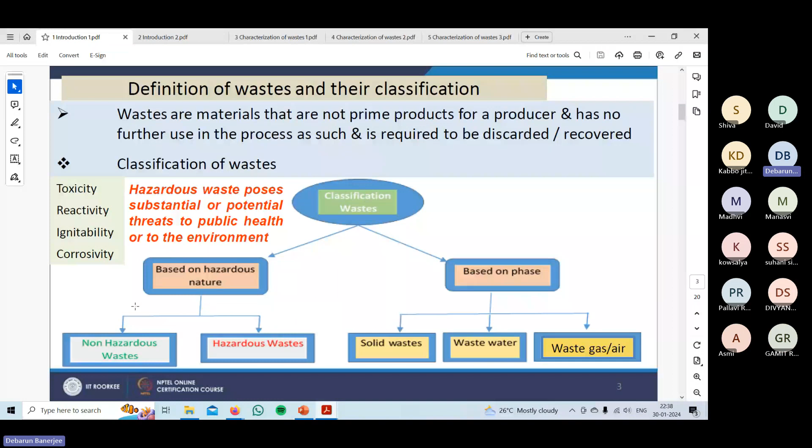When you talk about hazardous waste and non-hazardous waste, why are these particular things important? Because hazardous waste poses a certain amount of threat to our society or our health, and therefore its toxicity, reactivity, corrosivity, and ignitability become much more prominent. That is why it needs to be segregated based on whether it's hazardous or non-hazardous, and based on that its handling and processing would be depicted.

So there should be certain parameters, certain factors based on which waste can be segregated or categorized. Based on that, what can be the important quality parameters? The important quality parameters are...

Am I not audible? Audible to me.

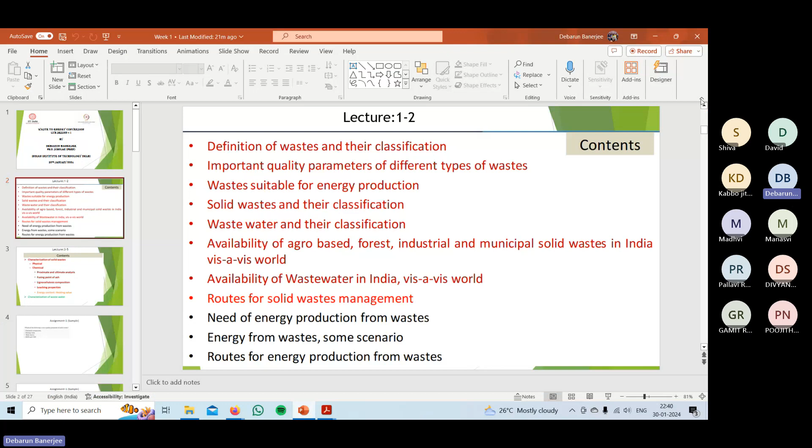Okay, coming back to our discussion. The solid waste's different quality parameters include the elemental composition, its proximate analysis results like moisture content, volatile matter, and ash content, its bulk density, its heating value - very important especially from the waste to energy conversion point of view - its permeability or hydraulic conductivity, and its particle size distribution. These are the main quality parameters of solid waste.

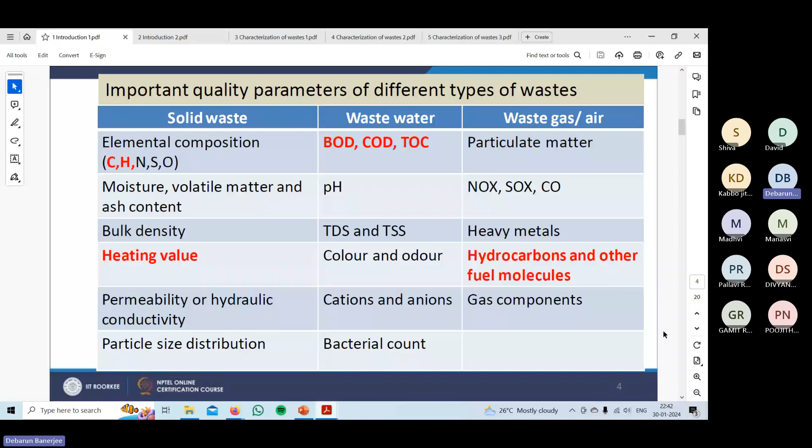Similarly, for wastewater: biological oxygen demand, chemical oxygen demand, total organic carbon, pH, total dissolved solid, total suspended solid, TDS, TSS, color and odor, cations and anions, and so on. Similarly, in gaseous waste: particulate matter, NOx, SOx, carbon monoxide, heavy metals, and other different materials like hydrocarbons or other fuel molecules or gas components.

As I initially told, what kind of wastes are actually suitable for energy production can be answered via quality parameters. Waste which can be used should have a high carbon content and a high heating value. Similarly, wastewater should have high biological oxygen demand and chemical oxygen demand values, and waste gases should have a high heating value.

So these are important parameters to be emphasized. This particular course is concentrated on solid wastes basically, and wastewater a bit. I would be more focused on solid wastes, and also to some extent on wastewater.

Coming to solid waste classification, I'll be discussing it further. It can be classified based on the source, based on biodegradability, based on combustibility, compostability, and usability. These are the basic classifications of solid wastes.

About 50% of solid waste is biodegradable in nature, 20% is recyclable, and 22% is inert. So you can find what comes under which category. There are also data on the different composition and heating values of solid waste in different cities and regions, but I won't go into much detail on that.

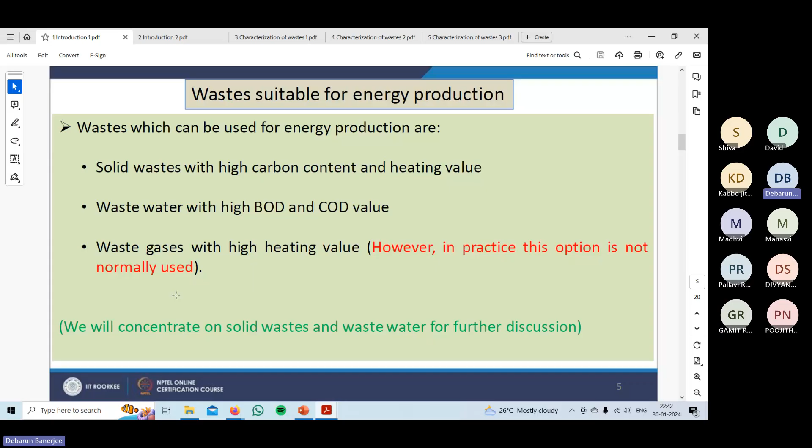Sorry, can't see the slides. I don't know if it's for others or only for me. Okay, I'll just unshare and share again. Is it visible now? Yes, thank you.

So the non-lignocellulosic biomass is basically edible in nature, and that is why for fuel production and energy production nowadays, the lignocellulosic biomass or lignocellulosic agricultural waste is being focused upon.

It contains majorly cellulose, hemicellulose, and lignin as major components. Based on their relative compositions, differences are made, and based on that, differences in their heating value and in energy production occur.

Similarly, wastewater has its own different classification. Wastewater can be obtained from oil spilling, rain leachate, industries, domestics, seawater, or storm drains. So these are different sources for wastewater.

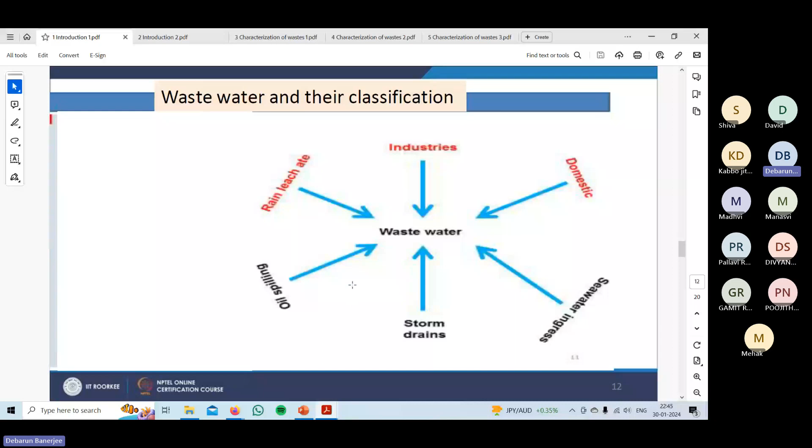A very typical composition of untreated domestic wastewater is shown here. Based on quality parameters like total solids, total dissolved solids, total suspended solids, BOD, and COD, wastewater is classified into different classes like low strength, medium strength, and high strength.

Basically, BOD and COD are the most important quality parameters of a particular wastewater. There's a simple relationship: higher BOD and higher COD means its concentration is more and it's stronger. Low strength wastewater has a low BOD of about 110, or COD of about 250.

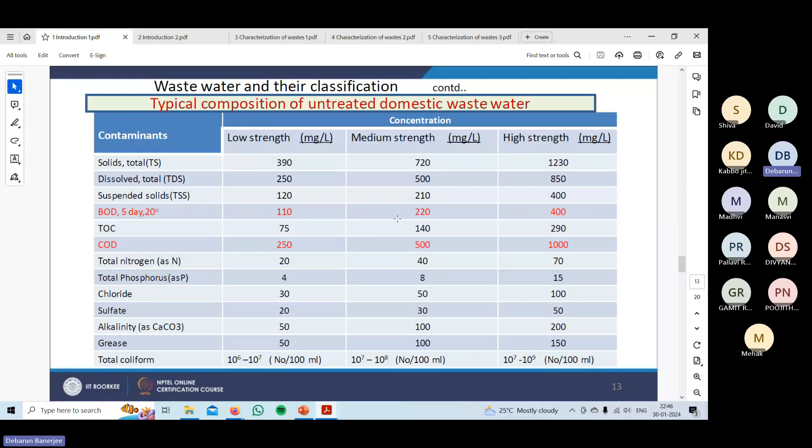Similarly, medium strength has about double that. So it's a kind of typical composition, obviously not a constant value—it would depend on various factors and sources.

Similarly, different types of other wastewater compositions, depending on sources like pulp and paper industry, distillery, sugar industry, are all classified, and the loads of this data are available in your note sheet.

The availability of agro waste, forest, industrial, and municipal solid waste in India is presented in this lecture. The generation of municipal solid waste is expected to rise by roughly 8% per year. Nowadays, climate change and waste management are the two most prominent problems in the global scenario as well as from an Indian scenario.

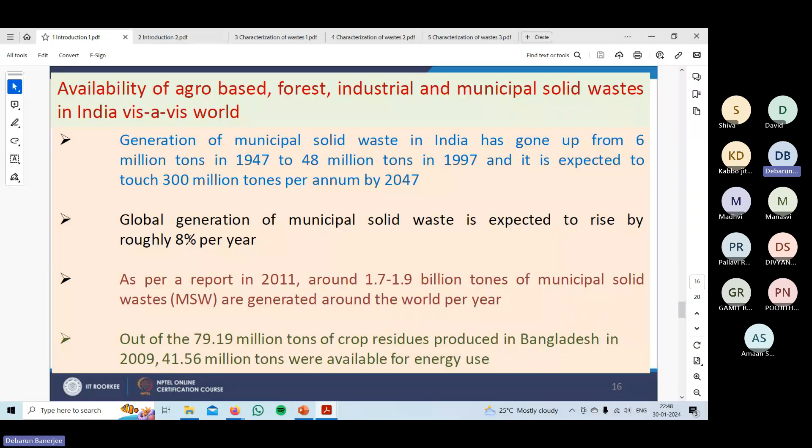However, this data is not very recent. In a 2011 report, close to 2 billion tons of municipal solid waste were generated around the world. Obviously this value has also increased, which is why roughly an 8 to 10% increase is usually exhibited.

So when you talk about solid waste management, there are different routes for solid waste management. Usually at source it is segregated, so that initial classification is very important—whether it's recyclable, hazardous, inert, or non-hazardous organic fraction.

After that segregation, the recyclable waste can be further segregated into combustible and non-combustible. The combustible parts basically go for fuel production and also some packing material or paper formation. The non-combustible parts such as metals, glasses, those kinds of materials come under non-combustible, and those go to the recycling industries. This kind of glass and metal can be recycled, recovered from the waste, and then goes back to the sources to synthesize further items.

So these form the part of the circular economy. Similarly, the combustible goes for fuel production, which comes majorly in the waste to energy conversion. Similarly, the organic fraction undergoes biological treatment—composting, vermicomposting, biogas, landfill gas, like this. So via these biological treatments, this kind of organic waste is treated.

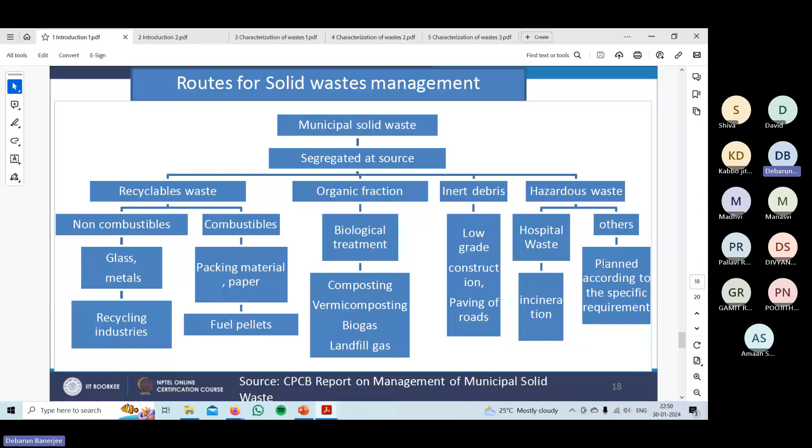Similarly, other wastes like inert and hazardous waste are also treated—not going into much detail for that. Further, some data are also shared within the first lecture.

Now we come to the second lecture. So after the routes for solid waste management covered in the first lecture, now the second one: need of energy production from wastes.

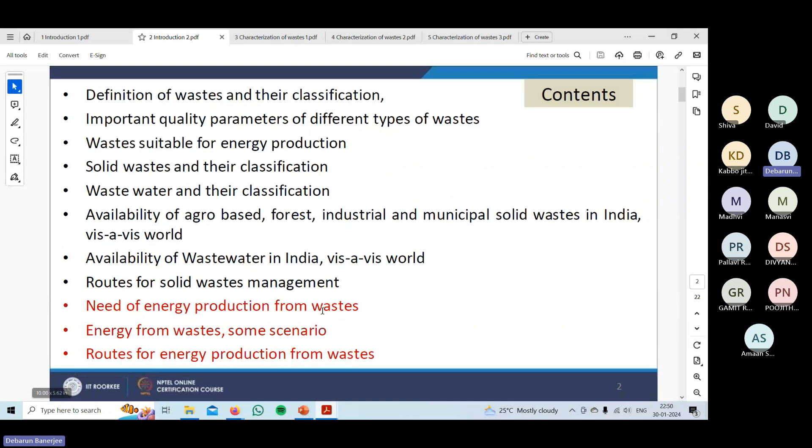These are interesting things, like why do we want to produce energy from waste? There are some points mentioned here: need of sustainable development, increasing generation of wastes and power demand, energy potential of some solid waste components and wastewaters, reduction of inert in municipal solid waste.

As I told, climate change and waste management are the two most prominent problems globally nowadays. To tackle these two challenges together, waste conversion to energy or waste conversion to value-added products is the most important solution. So until and unless we reduce the amount of waste lying and get the waste composted or incinerated, we cannot tackle the climate change as well as the growing energy demand.

There is a high amount of energy demand with the growing population and with the growing development, the modernization of the current global scenario. So to tackle this kind of situation, this conversion of waste to a high energy material or particular direct energy production is important.

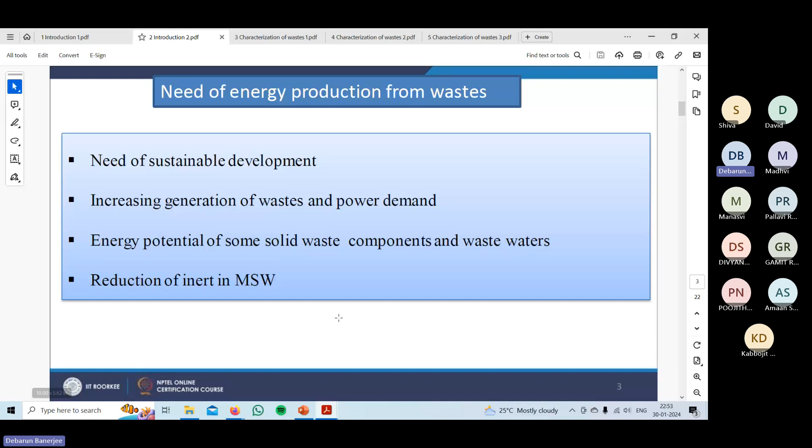As is written here, some of the solid waste components have a high energy value or high heating value or high energy potential, so why do we waste that particular energy potential? Ultimately, if we do a techno-economic analysis or life cycle analysis, you would find it becomes much more economically viable and environmentally benign if we convert these solid waste components or wastewaters to some energy material or directly produce energy from it.

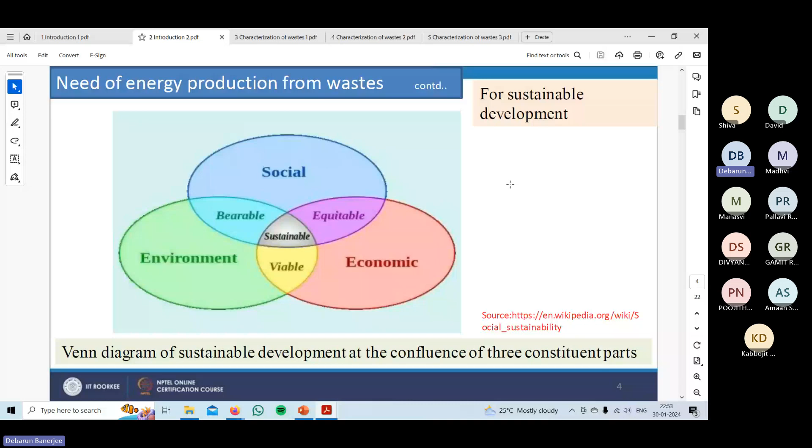As I told, there's the environment, economic and social—at the conjunction of all these three comes sustainable development. It has the economic part, the environmental impact, environmental viability, environmental positive approach, and the social responsibility. That is why energy production from waste is very, very important.

Now, why again is proper solid waste management important? If we don't do proper solid waste management, it would cause air pollution, water pollution, soil pollution—different types of pollution. Again, environmental contamination occurs during the process, obviously, since no process is absolutely emission-free or 100% green. So during the process there is some pollution, some contamination in some way or the other.

Now, if we generate waste and don't treat it properly, that waste would also cause other forms of pollution like air, water, and soil pollution. Some examples: municipal solid waste clogs the drainage system. We have seen this, like plastics and other solid waste which are not very biodegradable actually block your drainage system, pipes, the sewage things, and ultimately it causes stagnant water, which causes breeding of mosquitoes or insects. And if your wastewater pipe is getting clogged, it would ultimately overflow and cause floods and all these things. So together, all kinds of pollution, all kinds of environmental contamination, take part in this.

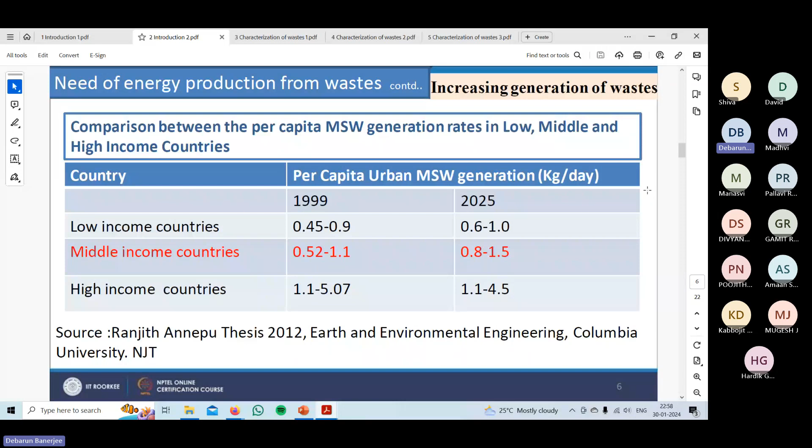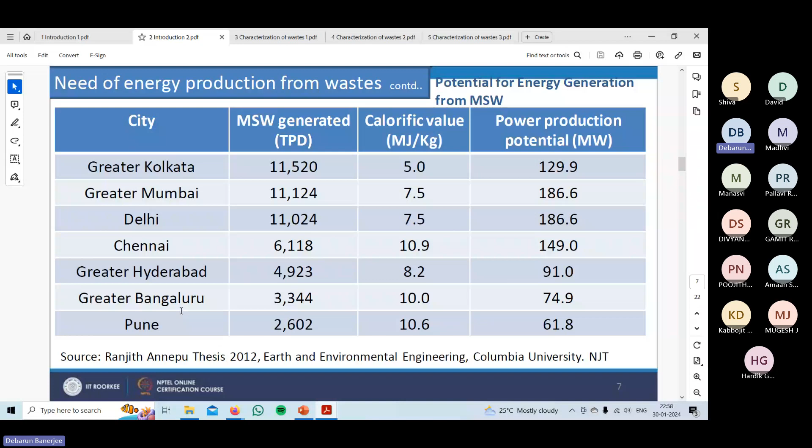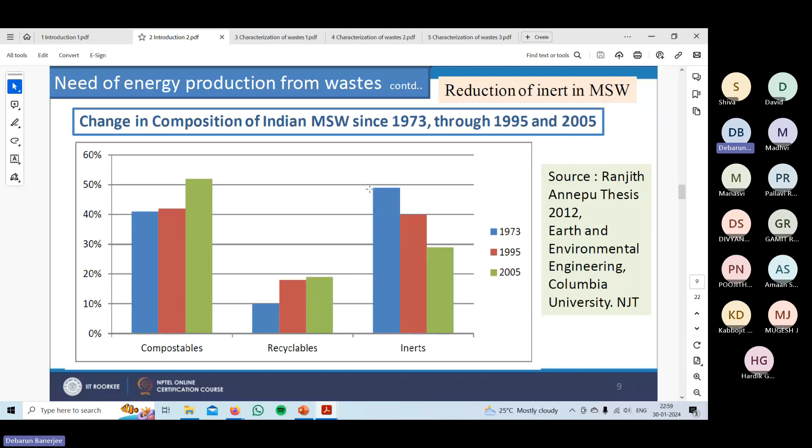And if we see the ratio of the different types of waste materials, you can see that the inert materials are decreasing, and comparatively the compostables have a much higher increase, and the recyclables also have a steady increase. So it means that in some way or the other, municipal solid waste to energy conversion is getting more and more encouraged. One such example is the reduction of inert materials in municipal solid waste. And some further examples are shown here.

And if we want to give an overview of the overall scenario of waste to energy conversion, we can say that waste to energy technologies use municipal solid waste or any other waste material containing huge amounts of renewable and biological materials to generate heat, electricity and fuel through different complex conversion methods. This is a one line statement about the overall scenario. What is waste to energy?

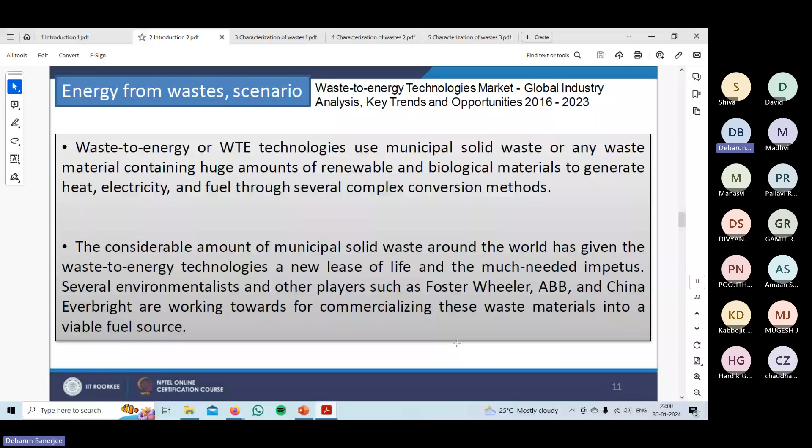Technology conversion. The considerable amount of municipal solid waste around the world has given waste to energy technologies a new lease of life and the much needed impetus. Several environmentalists and other players are working towards commercializing these waste materials into a viable fuel source. I've already talked about this. So the cycle of waste to energy is also very important.

In a household, a certain amount of waste is generated. Then it is thermally treated in waste to energy plants, and from the plants we get different energy sources, fuels in different forms, whether liquid fuel, solid fuel, or some other. And from that waste to energy conversion, a certain amount of heat is also provided. That heat we can further utilize for the inhabitants, the households, or other industries, roadside electricity, street lights, all those things.

It can be used to generate electricity. That electricity can be used directly to supply the households and the society. So ultimately, you're saving. So it basically works as a waste to energy cycle in a cyclic form, which ultimately targets a circular economy rather than a linear economy.

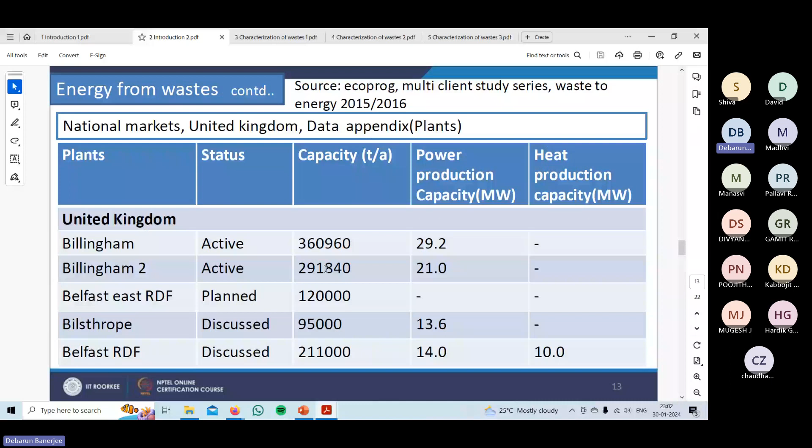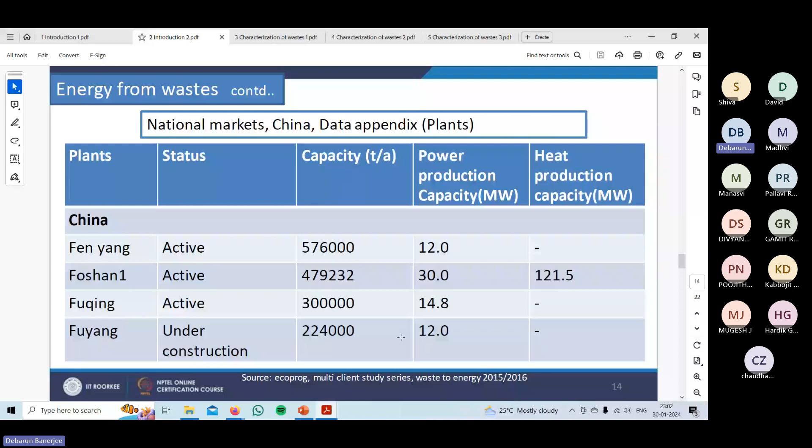Okay. I am not going into the details of these particular data; you can easily find them. So a lot of focus nowadays is being put on renewable energies such as wind energy, hydropower, biomass, and among them waste to energy also.

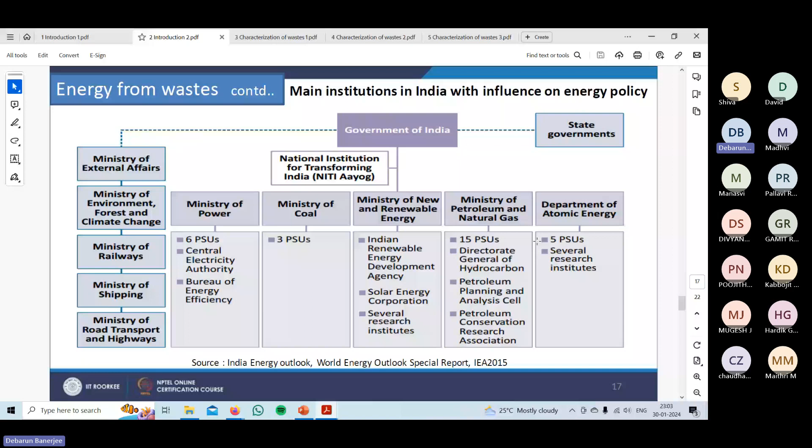And then some Indian data and information, where the main institutions which govern or determine the energy policy of the country are listed here, such as the Ministry of External Affairs, Ministry of Environment, Forest and Climate Change, Ministry of Power, Ministry of Coal, New and Renewable Energy (MNRE), Ministry of Petroleum and Natural Gas, and DAE, the Department of Atomic Energy. So these are some of the stakeholders in energy policy determination.

Okay. Now we will go to a bit of the technical things. So the routes for energy production from waste. Solid waste and biomass are what we will be focusing on. This kind of solid waste and biomass can be converted to energy via thermochemical conversion, biological conversion, chemical conversion, and physical conversion. Under thermochemical conversion, we get combustion, gasification, pyrolysis, liquefaction, those kinds of processes.

Biological conversion is carried out via processes based on bacteria, based on enzymes, those kinds of biological sources, which carry out energy production via fermentation, anaerobic digestion, and the different ultimate products used as an energy source are also shown here. Okay.

Apart from that, chemical conversion like transesterification, hydrolysis, solvent extraction, those are the chemical processes. And a basic physical conversion. However, physical conversion directly is not much helpful for renewable fuel generation. So after physical conversion, what is usually being researched or emphasized nowadays is to further modify this physically treated biomass or waste material

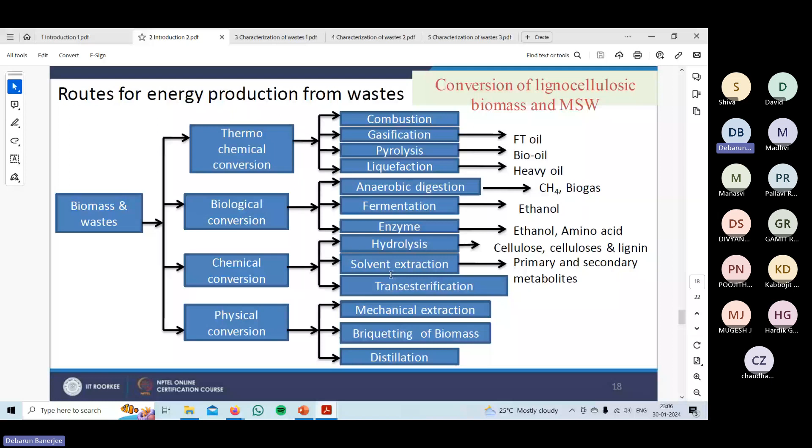So thermochemical versus biological conversion. If you compare these two conversion routes, thermochemical conversion is carried out at higher temperature or harsh conditions, usually requiring high temperature and pressure, and it's a much more conventional route. So its universality is very high; it's effectively applied to almost any biomass feedstock. On the other hand, the biological route involves the use of microbes, enzymes, or different chemicals to utilize a limited range of biomass.

So, as I told, high temperature and pressure conditions are usually required in thermochemical conversion, so it usually results in a relatively higher rate of productivity. The biological process, on the other hand, involves microbes, enzymes, or bacteria, so the rate of production is usually low. The rate of reaction, the rate constant, all those are usually low, so it's a much slower process.

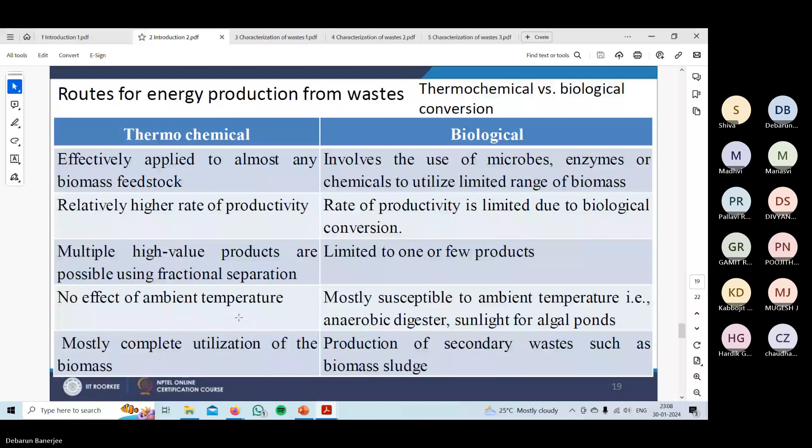Okay. So similar to solid waste, wastewater is also a good source of energy. Wastewater can be converted via anaerobic digestion and used for biogas production, and wastewater can also be used in microbial fuel cells for electricity generation. Okay.

So there are also some challenges, some regulations, and some other aspects we need to consider together. These different technology options are not all mature enough. I already told you that the thermochemical process is much more mature and has been developed for a long time.

Nowadays the biological process is also done commercially, but there are also photocatalytic, electrocatalytic, and plasma technologies. These new age technologies are growing day in, day out. They have only been proven at laboratory scale or maybe up to pilot scale, but not at a high commercial level. So those are the other growing options which can change the way waste to energy production technologies look or work. Okay.

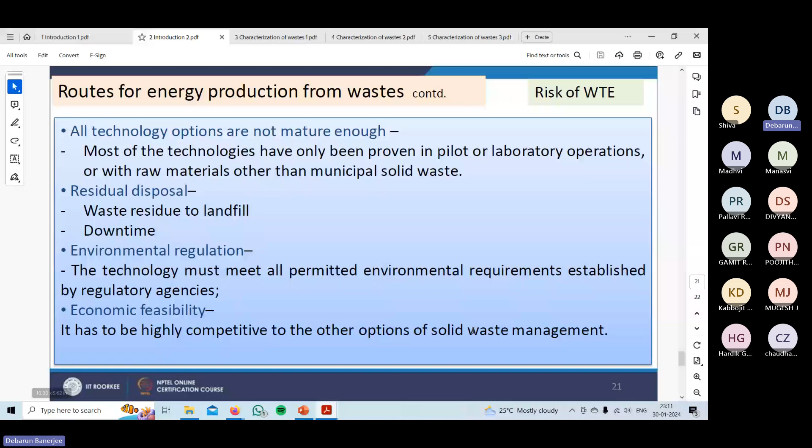Yeah. So that was the second lecture. Okay.

So from third to fifth lecture, what has been taught is basically the characterization of solid wastes, different physical characterization, chemical characterization. Under the chemical characterizations, the proximate and ultimate analysis comes. Along with that, the fusion point of ash, lignocellulosic composition, the different leaching properties of the solid waste, and obviously the most important, how much energy it actually contains, or how much energy it can actually produce when it would be used in a particular energy production technology. That heating value estimation is very important.

And apart from the solid waste characterization, there are different characterizations of the wastewater, such as the TDS, TSS, COD, BOD: the total suspended solid, total dissolved solid, total oxygen demand, chemical oxygen demand, biological oxygen demand. Those are some of the things which were also shown. Okay. So the physical properties which are important are specific weight or density, particle size and size distribution, permeability or hydraulic conductivity, and moisture content. Those are some of the important physical properties.

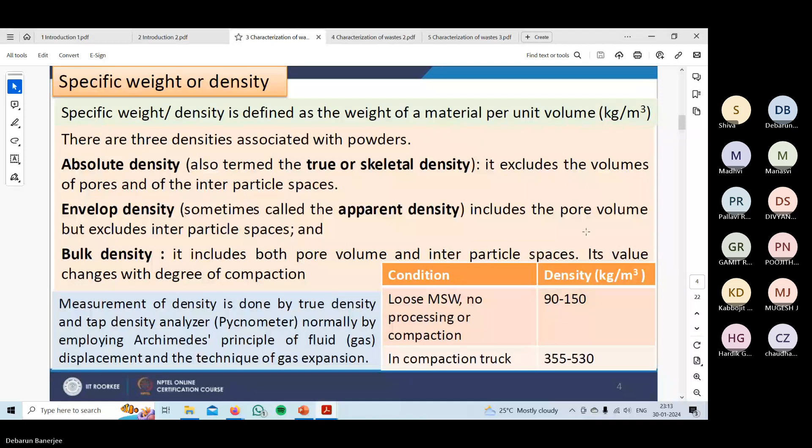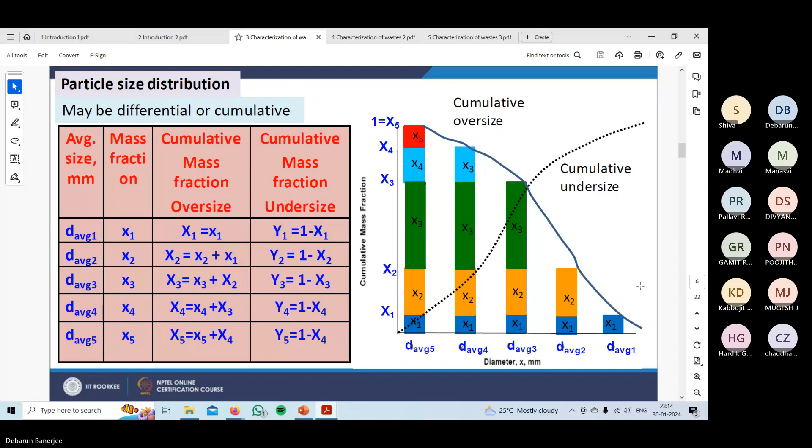So when we talk about solid waste, that is one of the major challenges which I think solid waste management has: the heterogeneity. There are multiple varieties of waste materials or waste samples, so to characterize them based on a certain defined factor becomes a very challenging thing.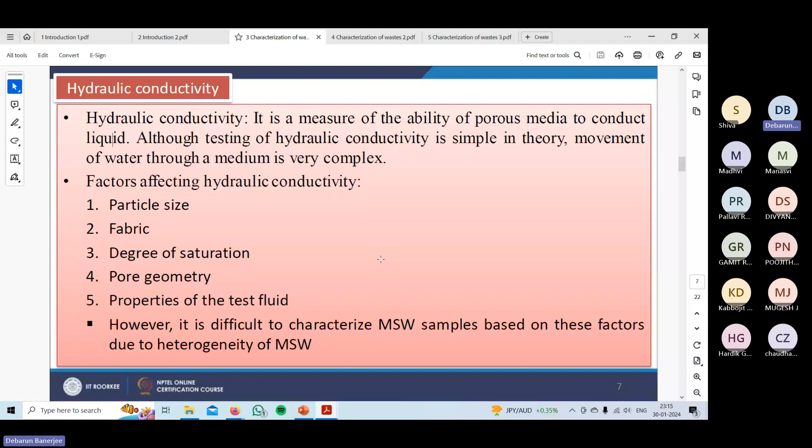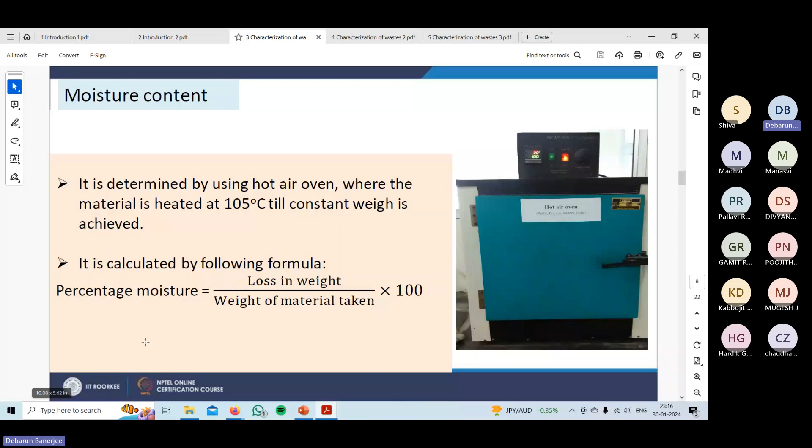Then the moisture content. So how is it determined? Moisture content is determined by using a hot air oven where the material is heated at 105 degrees Celsius till constant weight is achieved, and it's calculated by a simple formula: the loss in weight divided by weight of material taken. This will be the percentage moisture. Very simple. Similarly, the chemical properties of the solid waste can be determined by the proximate analysis, the ultimate analysis, the fusing point of ash, lignocellulosic composition.

For the hazardous waste, particularly the leaching properties, because of their hazardous nature, we need to know when you are carrying this particular waste, or when it is in contact with some other material, whether it would get leached or not, in some adverse conditions, because maybe some radioactive material is there, uranium, thorium. Those kinds of radioactive materials are very dangerous. Even at the ppm level or the ppb level, they are very dangerous, and they create some serious issues in the human body, right? So that is why these leaching properties are important to understand and determine, and the energy content from the heating value.

So proximate analysis gives us the details about the moisture content, volatile matter content, ash content, and fixed carbon content via different ways of heating the material. Okay, and for different municipal solid waste, their moisture, volatile, and this kind of composition is also very different.

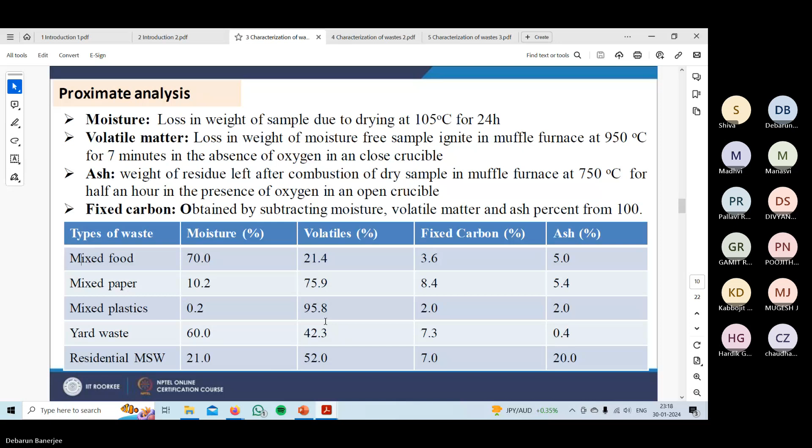Similarly, the CHNS analysis or the ultimate analysis gives us the carbon, hydrogen, nitrogen, and sulfur quantity of the waste material. And how it is calculated: it is basically calculated via the emission of carbon dioxide, H2O, nitrogen, which is usually inert, and SO2, sulfur dioxide. So based on how much of those gases are emitted, we take it that S plus O2 is SO2, right? So 1 mole of S would give us 1 mole of SO2.

So if we get a certain amount of SO2 in the output, we know that this amount of sulfur is present. Similarly with the CO2 and H2O, and N2 also, right? And N2 can remain as nitrogen, or it can become nitrous or nitric oxides, NO or NO2. So there are different chambers, different collecting traps and absorbing traps where these different gases are selectively absorbed, and based on that they are quantified.

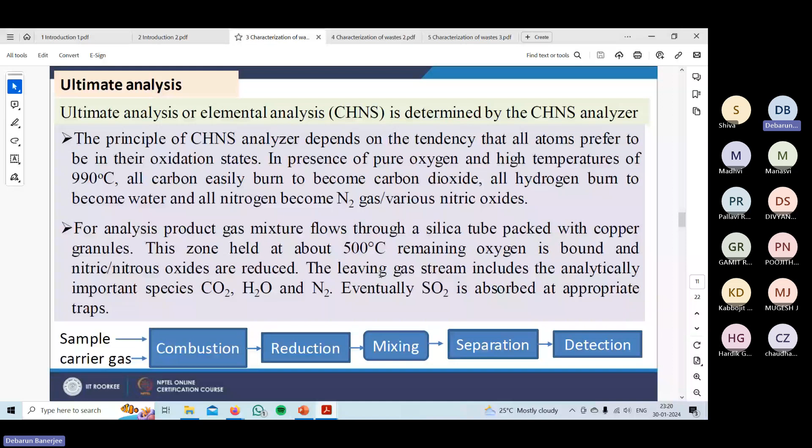Okay, so in the ultimate analysis, high purity helium is used as carrier gas, and finally the gas mixture is brought to a defined pressure or volume state and is passed to a gas chromatographic system, GC. So the GC would give us the nitrogen, CO2, H2O and SO2 as I told. And via the calibration, you get the area under the curve of each gas, and we do the back calculation that 1 mole of S would give us 1 mole of SO2. So by back calculation we get that this amount of sulfur is present in our sample. Similarly with the other elements also.

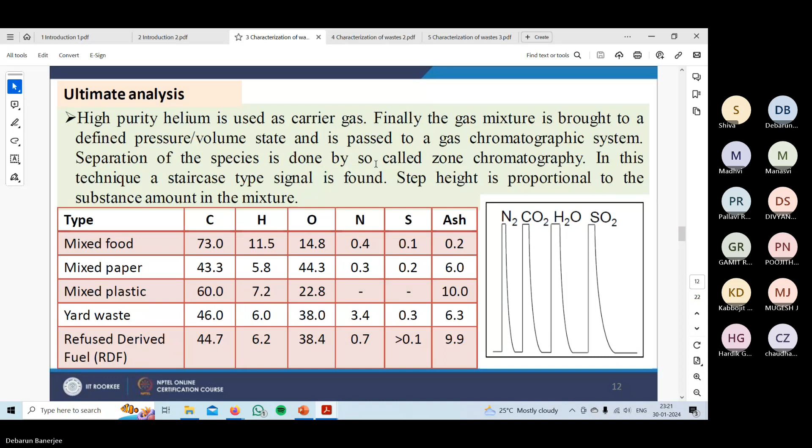So another characterization technique is the fusing point of ash. The fusing point of ash is the temperature at which the ash resulting from the burning of waste forms a solid by fusion and agglomeration. Usually the waste material has a high fusing temperature, about 1100 or 1200 degrees Celsius. So it is the temperature of the ash formed after the conversion of the waste material, so we know the operating temperature range for this particular ash as well.

So that is why these temperatures are important, and experimentally it can be determined using a furnace, simply taking different temperature values and checking when the ash forms a solid clinker by fusion and agglomeration. Usually ash is a powdery kind of material, but when it is oxidized again at a very high temperature in the furnace, it undergoes agglomeration, and that temperature is called the ash fusion temperature.

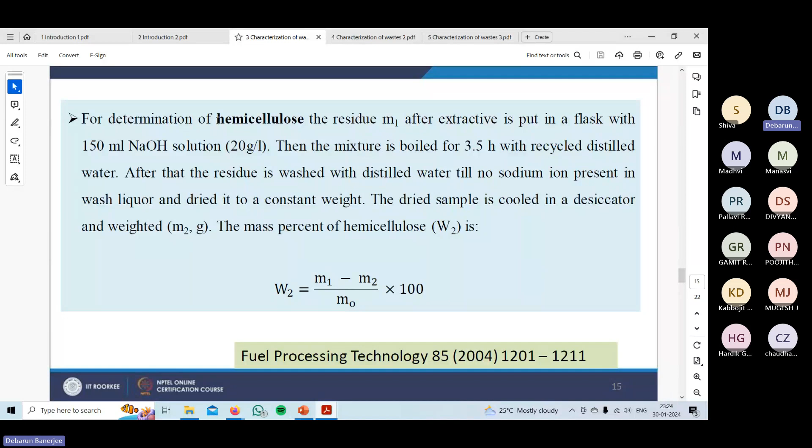Which means that the benzene and ethanol mixture has actually extracted that kind of material from your lignocellulosic sample. So that is called the amount of the extractives in the sample. Similarly, for determination of hemicellulose, after the extractives, because otherwise these extractives, if you don't extract them, would be incorporated or would create some problems during these other materials' calculations. So that is why the extractives are usually taken out earlier, and then the hemicellulose, lignin, and cellulose determination.

Okay, those details are already shown in the particular lecture. You should go through it. And also the leaching test is particularly for hazardous material. What the leaching test determines is the different heavy metals like arsenic, barium, cadmium, chromium, lead, mercury, selenium, silver, these kinds of heavy metals, and some organic solvents like carbon tetrachloride, pyridine, benzene, and all these things.

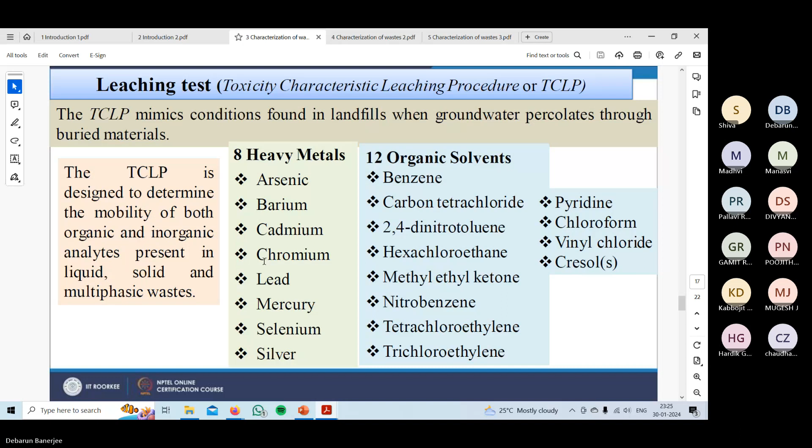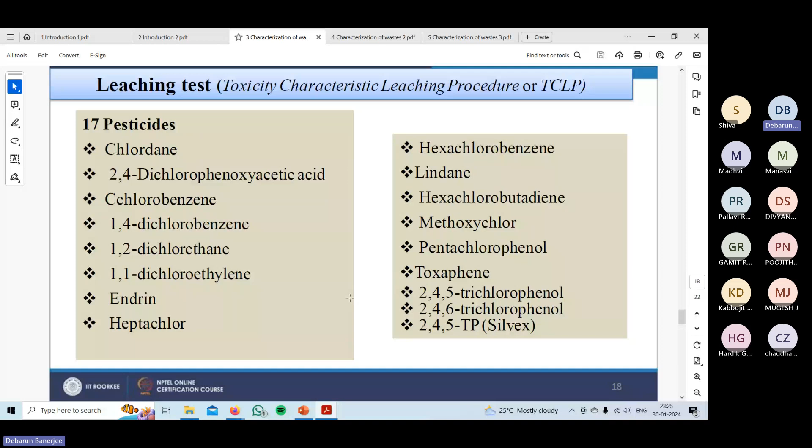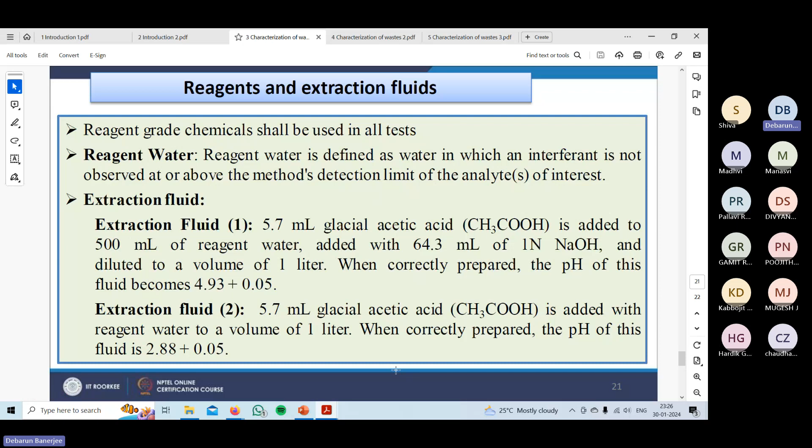Okay, and apart from that, some pesticides can also be identified, whether this particular material is present and whether it is getting leached or not. Okay, and some other reagents, and basically the extraction fluid quantities for the waste-to-energy conversion, and as a part of this characterization, materials like the reagent water, the extraction fluids, the different types of extraction fluids, those are also very important.

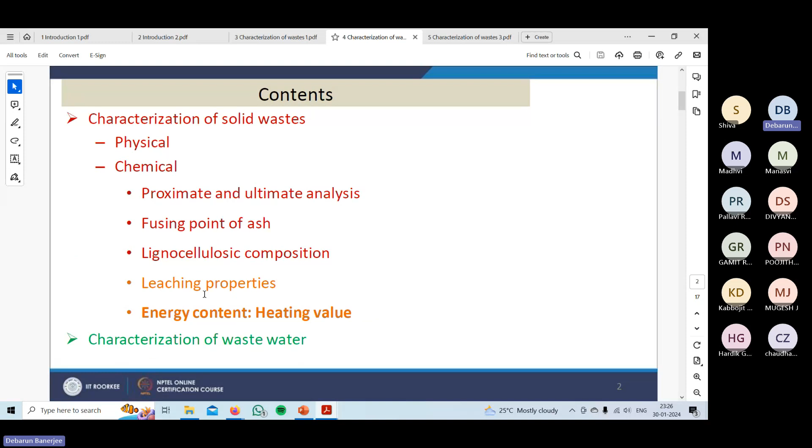In line with this, the heating value determination is also a very important aspect, the heating value or the calorific value as we call it. It can be a higher heating value or it can be a lower heating value. Okay, so usually a common method is to get the lower heating value and then add the heat of vaporization of the water. Just add them and then get the higher heating value.

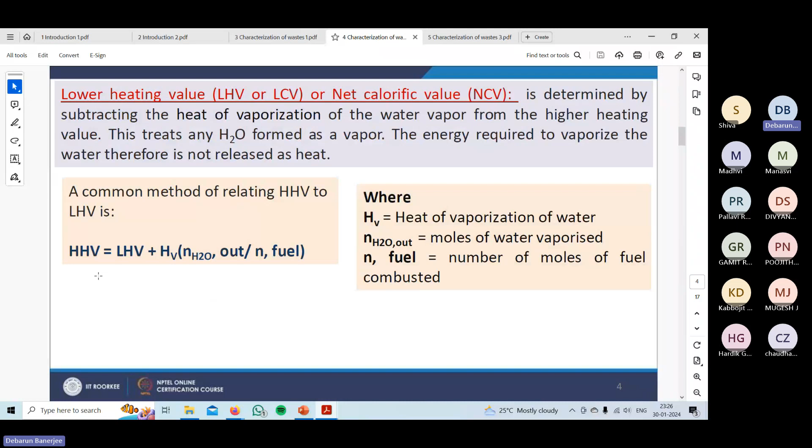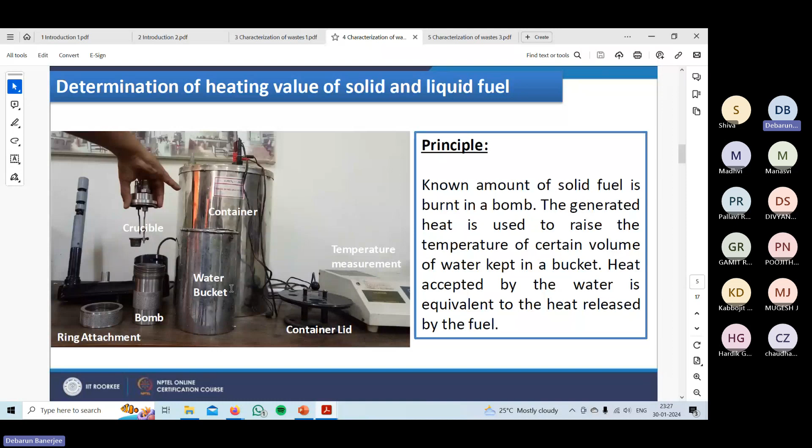So very simple, you place a sample in this bomb calorimeter and you ignite it. It would get burned or combusted, and obviously there will be some heat generation. That generated heat would increase the temperature of the water bucket in which the bomb is put. So from the temperature increase of the water we get how much heat is generated from the material. Okay,

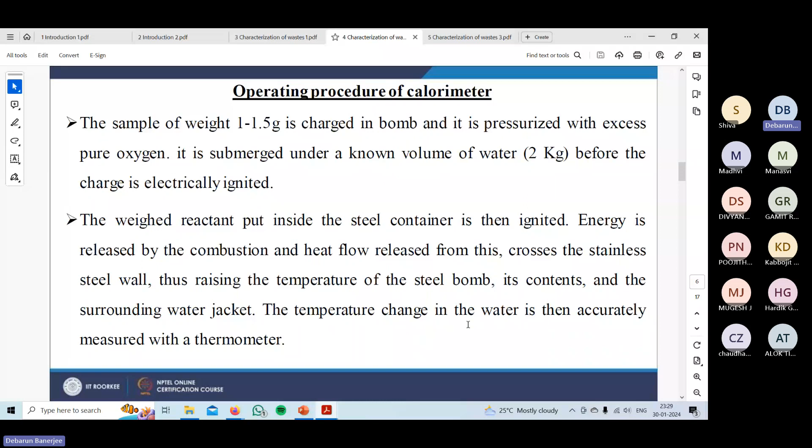surrounding water jacket. The steel bomb temperature increases, its contents' temperature increases, and the water temperature also increases. So that temperature change in the water is accurately measured and correlated with the amount of heat released. Okay, and then the heat of combustion is calculated based on that. There is also a problem; we will be discussing that sample problem.

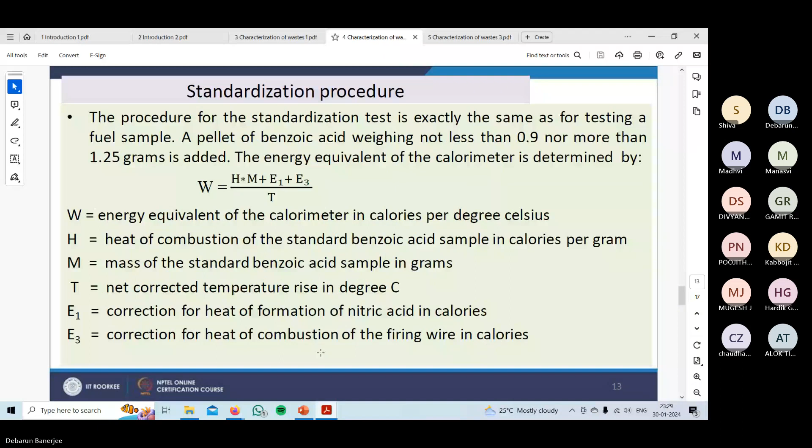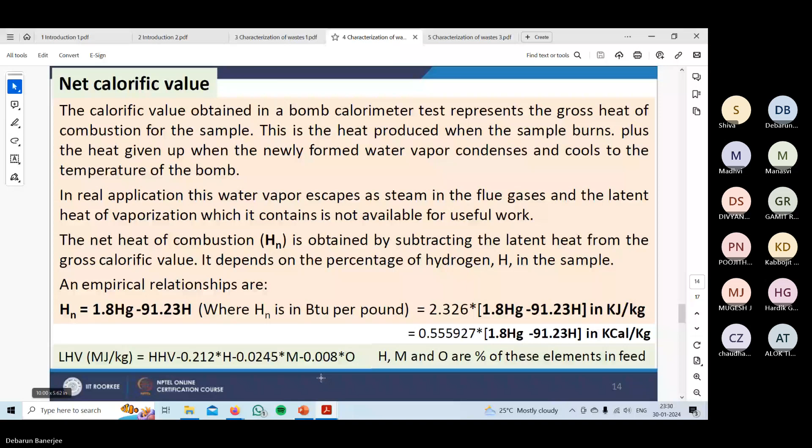And the way we get the gross calorific value, we use that gross calorific value, and using the net heat of combustion we can also get the net calorific value. So some correlations are also provided here between the net heat of combustion, the percentage of hydrogen and the gross calorific value. And based on that there are different correlations for determination of the gross calorific value based on the fixed carbon and volatile matter, and also based on the CHNS analysis. Multiple scientists have given different correlations.

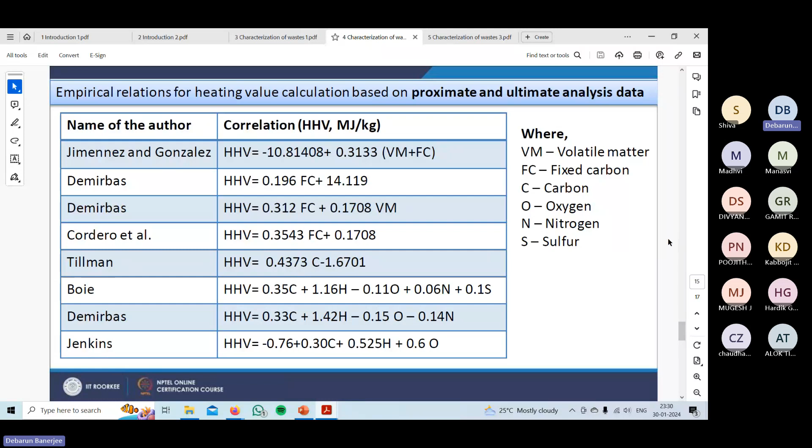If you are asked in your examination, it might be asked like this: based on the Jenkins correlation, determine the higher heating value of the material having this kind of composition. I don't know whether they might give you the correlation or not. So you might also check this kind of correlation. Okay.

The final lecture covers the characterization of wastewater, which involves physical, chemical, and biological characterization.

In physical characterization, we have total solids, which include total suspended solids such as turbidity, fixed suspended solids, volatile suspended solids, total dissolved solids, fixed or volatile dissolved solids, and simple properties like temperature, taste, odor, and color.

The important chemical characteristics are the hardness of water, BOD and COD, that is, biological oxygen demand and chemical oxygen demand.

Nutrients like nitrogen and phosphorus, the amounts of salts of inorganic materials like calcium, magnesium, aluminum, chlorine, carbonates and bicarbonates, and heavy metals, which were already discussed for solid waste.

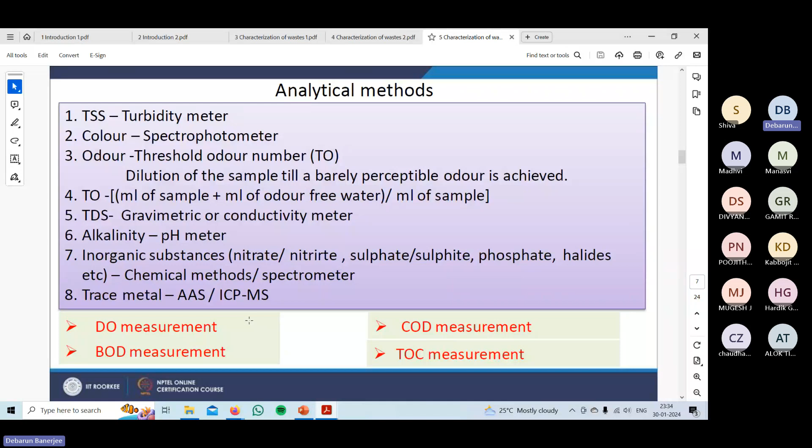ICP-MS stands for inductively coupled plasma mass spectrometry, and AAS is atomic absorption spectroscopy. These are usually used for metal or trace metal determination down to the ppm or even ppb level, for both solid and liquid materials.

Apart from that, dissolved oxygen measurement is carried out via Winkler's method, where excess manganese salt, iodide salt, and hydroxide ions are added to a water sample.

The dissolved oxygen converts the manganese ion Mn2+ to MnO2. This manganese-containing precipitate is then dissolved back into solution under acidic conditions.

The MnO2 gets dissolved again and is converted back into Mn2+ salt in the dissolved state. The iodide ion then gets converted into elemental iodine, and from that the dissolved oxygen is calculated.

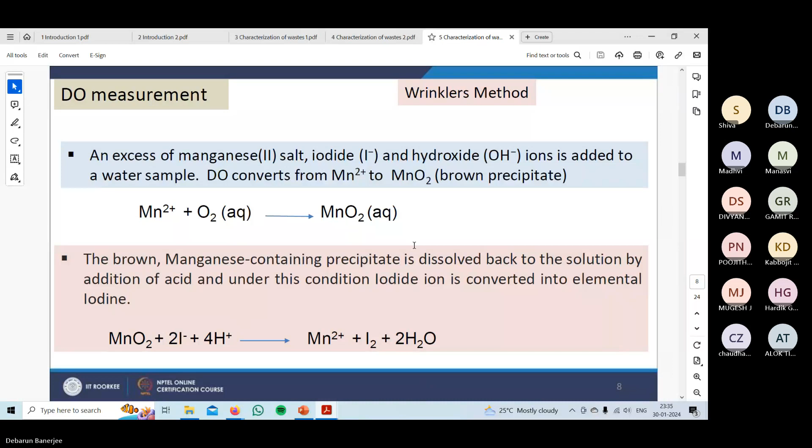Apart from the Winkler's method, another important technique is the membrane electrode method. In a typical dissolved oxygen sensor, there are two electrodes, an anode and a cathode.

The cathode is usually made of gold, and the anode is made of silver.

They are immersed in an electrolyte solution and separated from the sample to be measured by a gas-permeable membrane.

There is permeation between the cathode and anode within the electrolyte, and certain chemical reactions occur. At the gold cathode, oxygen plus 2H2O plus 4 electrons gives hydroxyl ions, and at the silver anode, silver chloride (AgCl) is formed.

Based on that, we get a resulting current flow.

There is migration of ions toward the cathode and anode from the electrolyte, and the amount of current flowed is measured. This resulting current flow is directly proportional to the dissolved oxygen content in the stream.

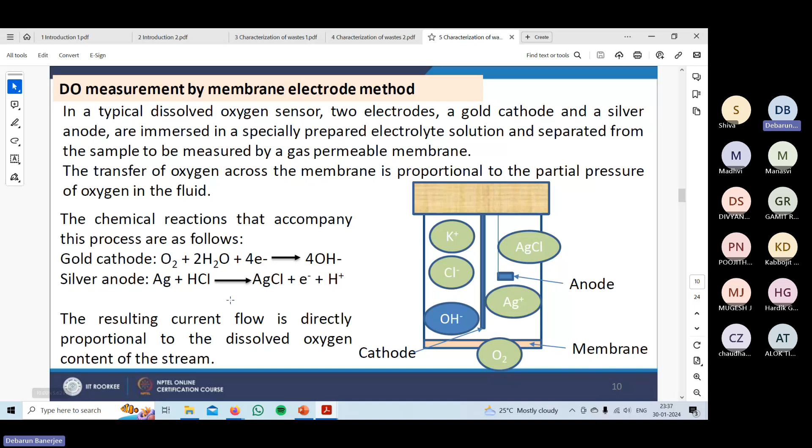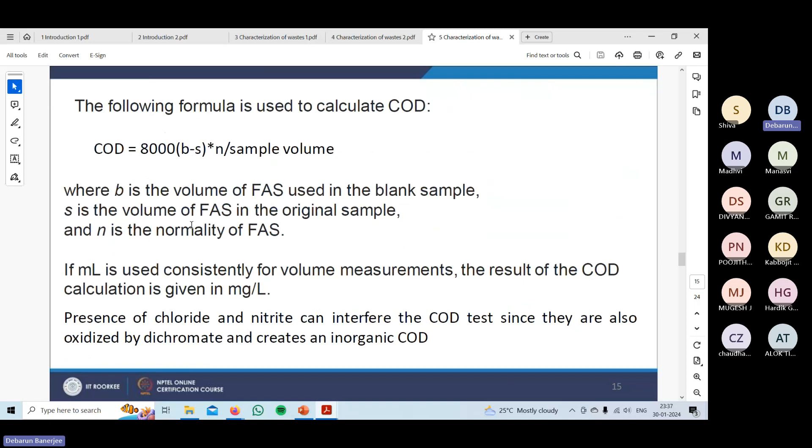Similarly, you should check BOD and COD methods. I'm not going into much detail on biological oxygen demand, chemical oxygen demand, or the total organic carbon test. As mentioned earlier, the atomic absorption spectrophotometer is also very important.

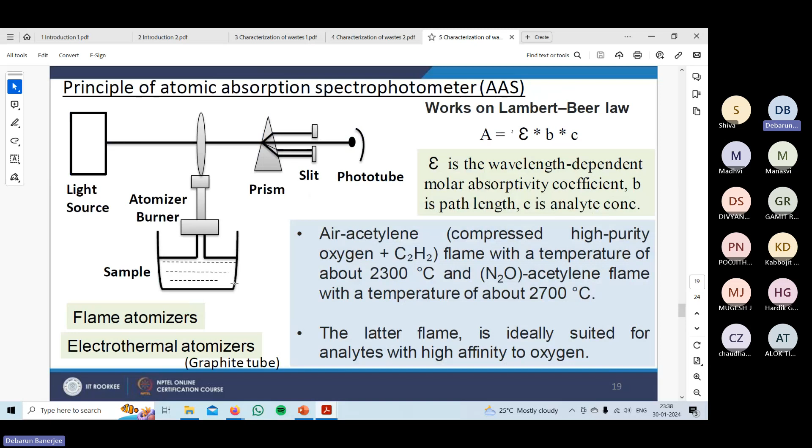They have shown the working principle of the atomic absorption spectrophotometer, which is used for metal determination or metal content determination even at very low quantities.

Apart from the chemical properties, some bacteriological or biological measurements are also done, such as based on the membrane filter technique, along with total solids and total volatile solids. You should check these methodologies as well.

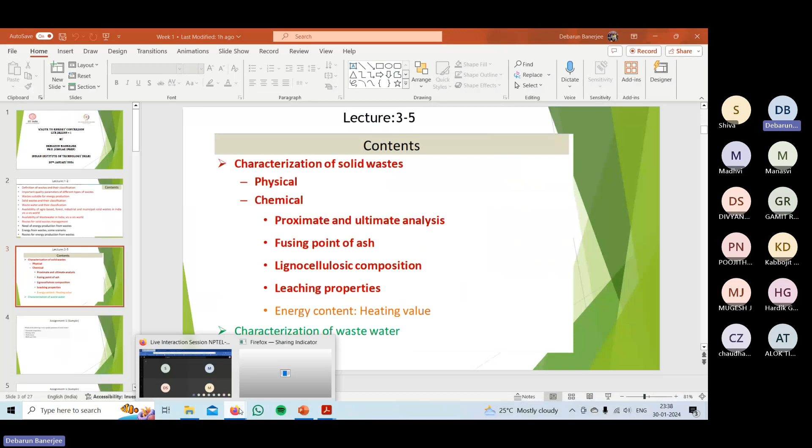After that, we'll check some sample questions.

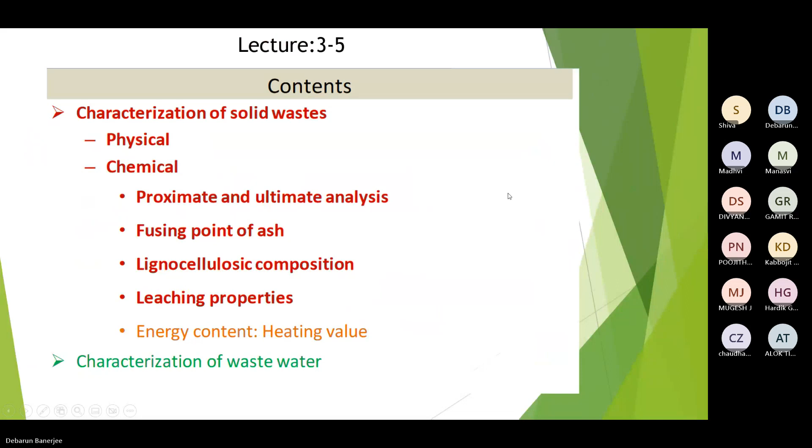Okay, so the first question is, which of the following is not a quality parameter of solid wastes? Elemental composition, heating value, bulk density, BOD and COD.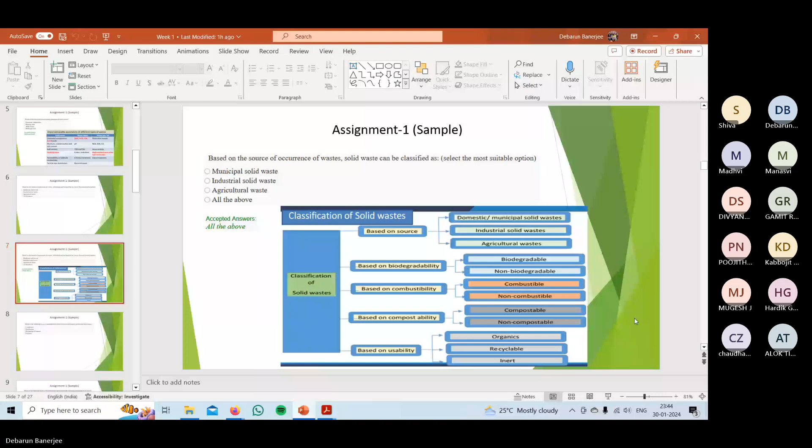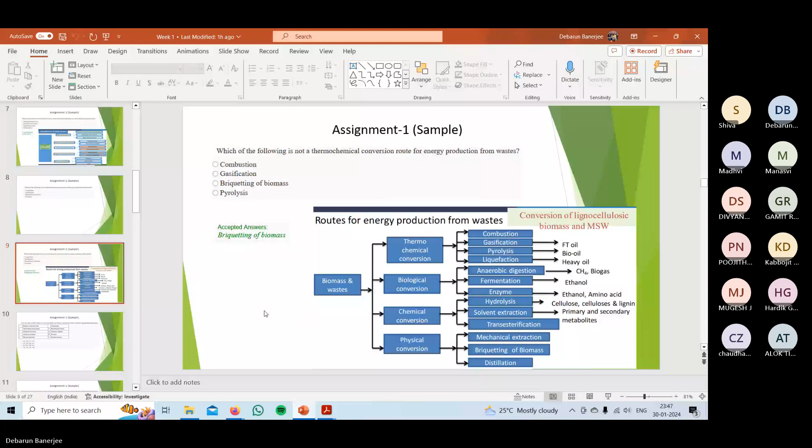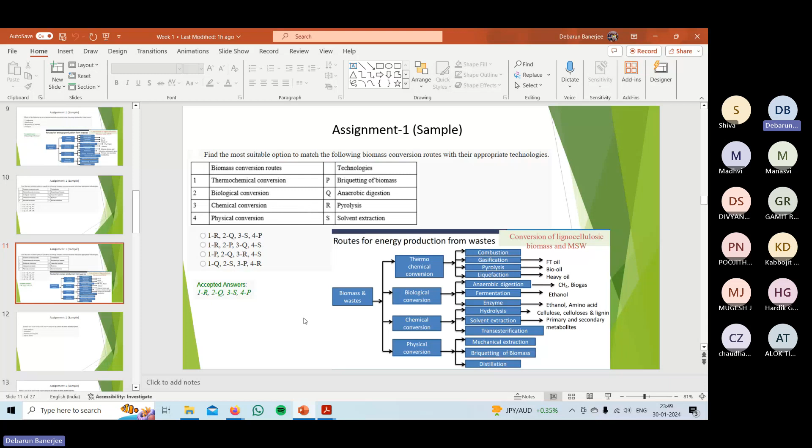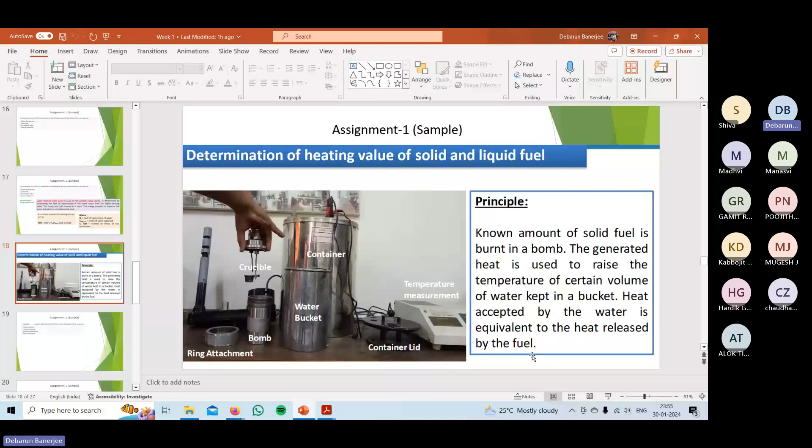And to determine that particular heating value, I've already shown that the bomb calorimeter is used, and basically the amount of temperature increase of the water is correlated with the heating value of the sample.

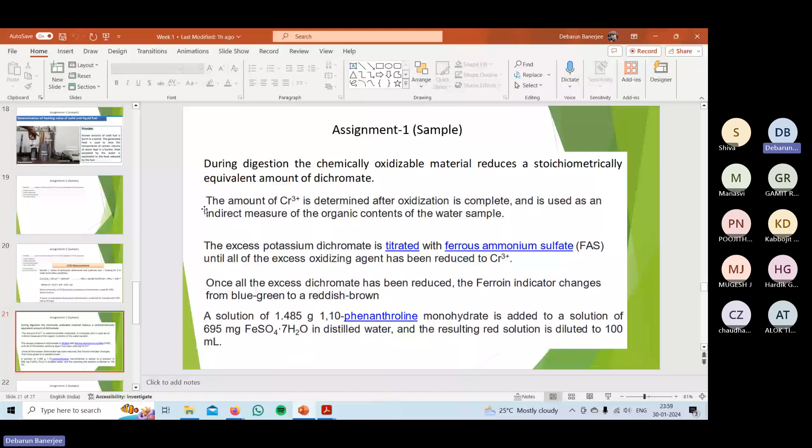So during the digestion of this particular chemically oxidizable material, a stoichiometrically equivalent amount of dichromate is reduced, and the amount of Cr3+ is determined after the complete oxidation, and that is used as the indirect measure of the organic component of the water sample. So the amount of Cr3+ is used as the indirect measure of the chemical oxygen demand content of this particular wastewater.

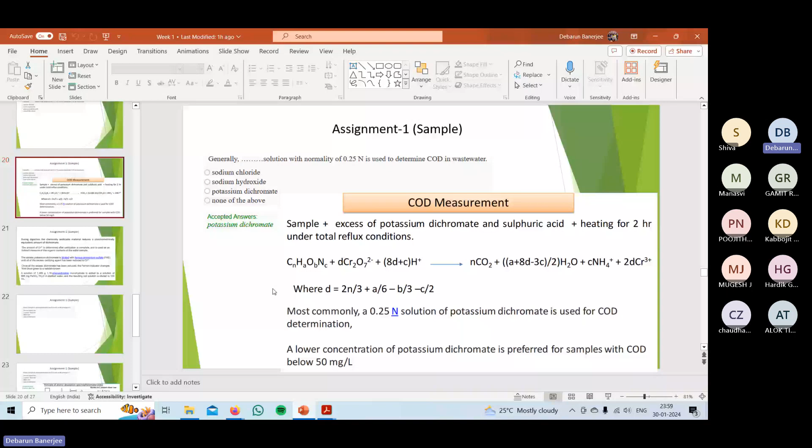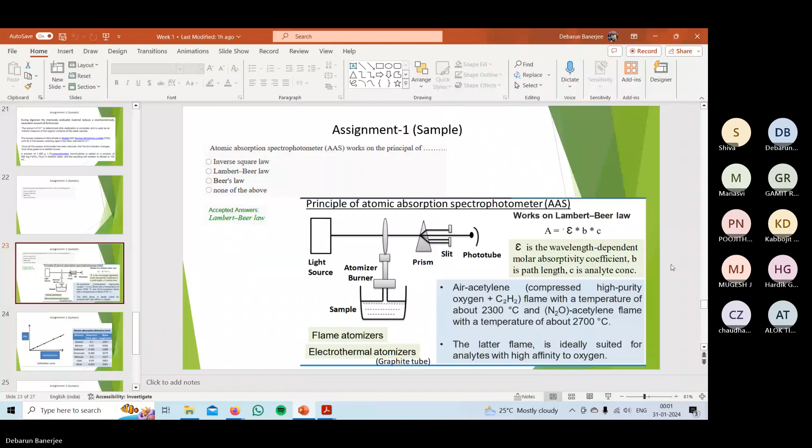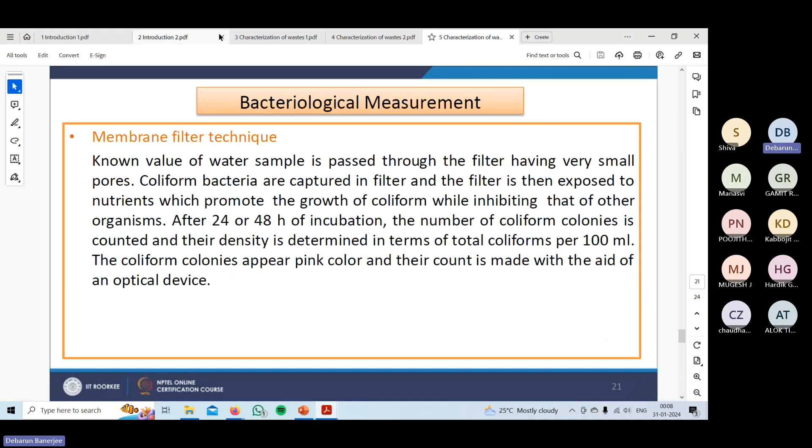So you have to basically use this kind of formula: the gross heating value equals T multiplied by W minus E1 minus E2 minus E3. This is basically the gross heat of combustion value, H, which is T multiplied by W minus E1 minus E2 minus E3, divided by M. So W is basically the energy equivalent of the calorimeter, and E1, E2, E3 are the correction factors.

E1 is basically equal to C1, E2 is basically 13.7 into C2, and E3 is basically, depending on where it's used, 2.3 into C3 or 2.7 into C3, or it can also be 0. M is the amount of material used, the mass of the sample. What are C1, C2, C3? C1 is the milliliter of the standard alkali solution used in the acid titration, C2 is the percentage of sulfur in the sample, and C3 is the centimeter of fuse wire.

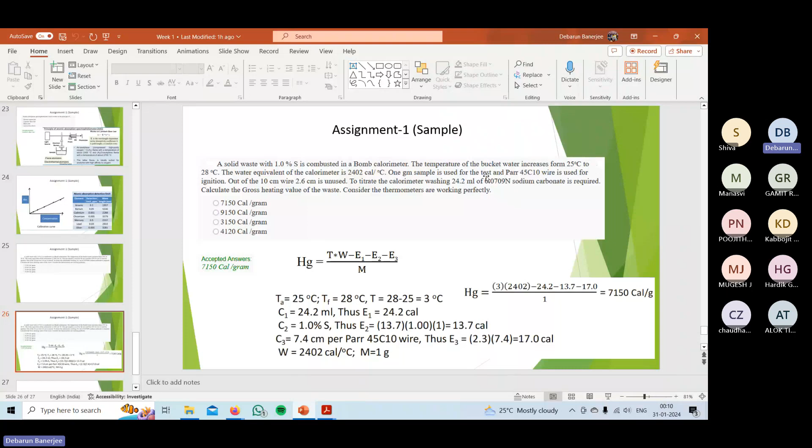So now we put the values. W, the water equivalent, is given as 2402. M is 1 gram, as given that 1 gram of sample is used. Now put the T value: T is basically the difference of temperature. The temperature of the water increases from 25 to 28, meaning 3 degrees. So T will be 3. W is 2402.

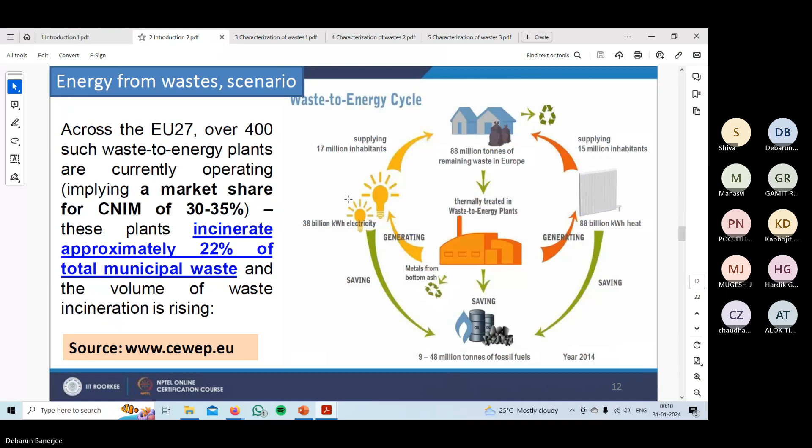Now E1, as I told, is equivalent to the C1 value. What is C1? C1 is given as 24.2 ml, the sodium carbonate solution volume used in the calorimeter titration. So C1 is 24.2.

Now what will be E3? For E3, it's given that a Parr 45C10 wire is used. What is this wire? It will be 2.3 into C3, right? So for E3, 2.3 into 7.4 you have to use. The C3 is given by how much wire is used: 10 minus 2.6 is 7.4. So 2.3 into 7.4 gives 17.0.

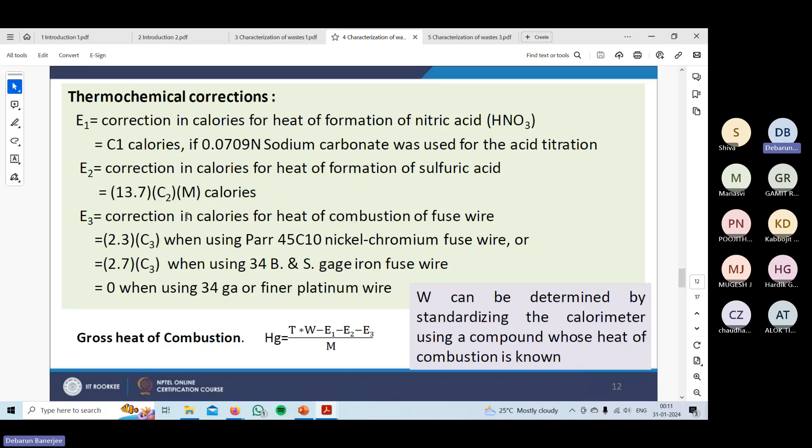And similarly, E2 will be 13.7 into C2, that is the E2. 13.7 into C2 into M. M is 1, C2 is also 1, since 1 gram of sample is used. So it's 13.7 into 1 into 1.

Now put all the values and you'll get the gross calorific value. It's 7150 calorie per gram. That's it.